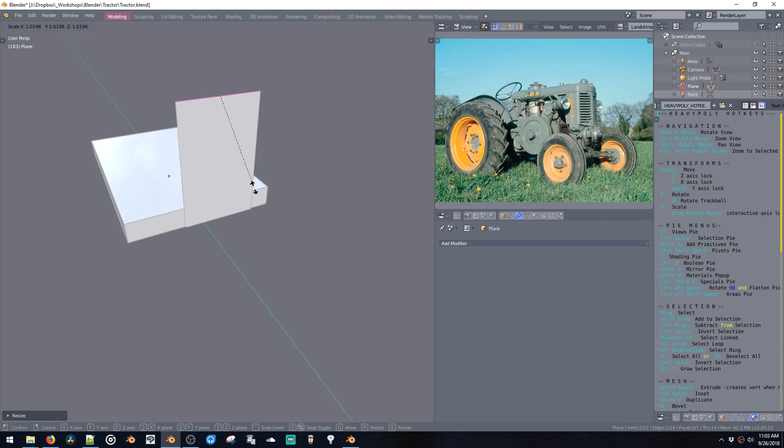Yeah, this is 2.8, so I spent all yesterday just messing around with 2.8 and trying to get these scripts up and running for my class tomorrow. So there's been a lot of Python lately, a little bit of scripting, trying to get 2.8 to be ready for prime time. So yeah, I'm pretty excited with what I did yesterday. It was a lot of frustration. I spent like 5 hours working on this stupid script that does a stupid thing, and now it's finally working, so I wanted to play with it.

Hi CNET, welcome. So today we are modeling a tractor instead of drawing it, and I hope that this video will be sort of a little something, for you guys who have never considered 3D, interesting to you as like a little demo of the kind of stuff that you can do with it.

And it's a lot like drawing actually, so I feel like it's pretty cool, the stuff that we can do. I feel like 3D modeling is related to drawing in that the process is similar, where we're trying to start off with very simple shapes and try to build things as simply as possible. And then as we keep going, we can get more and more into detail.

But for example, here I'm just going to start to bring out a bunch of rings pretty much, or donuts for the wheels, just very primitive shapes. And by the way, this is an Italian, what is it, Landini tractor.

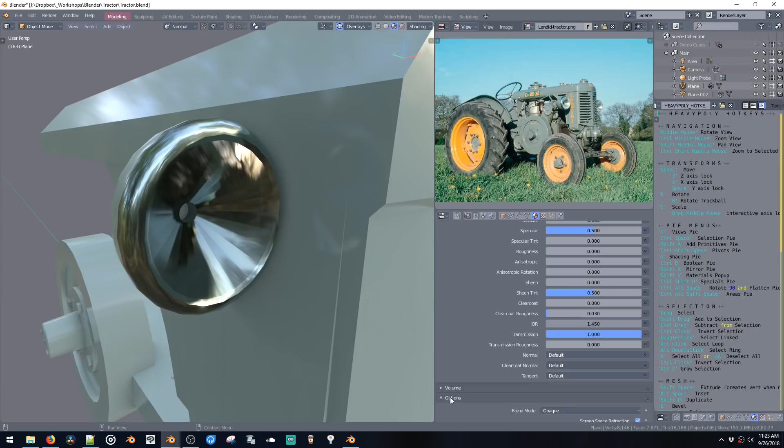And then Shift V, let's add a new material slot here and switch this to glass. And save this, I'm saving a lot because this is all new stuff and it may or may not crash. But yeah, we have glass in Eevee now, which is pretty sweet. You can adjust how thick it looks here, and give it some bubbles here. So yeah, that's pretty nice, decent.

I'm subdividing this to make it a little bit smoother. I feel like I could do the same thing here. I should have made this a little bit different.

Another option, if we need to make stuff smoother, is we could just subdivide the entire thing. But if I'm going to subdivide the entire thing, then I want to reduce my poly count a little bit. I know this is the heavy poly stream, but we still have to be responsible here with our poly counts, you know.

Alright, so if I go here, oops, Shift Z, Shift Z will go around in a circle like that, and then Shift Alt double click. Oh shit, what did I do? No, here, Shift Z, Shift Alt double click, Control X. Okay, so now I'm going to separate these two off with P, so these are on a separate mesh, and then I can subdivide these. So when you look at them in object mode, they get really, really smooth.

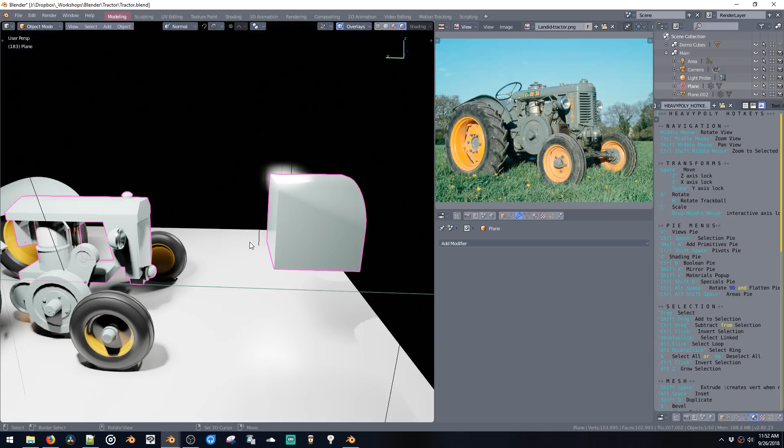MG says, I'm a 3D animator, just started my 3rd year, model a lot. Nice, that's a tough job. The animations, like, that would drive me crazy. I feel like that's the next level past of modeling. Never used 3D, I think I subscribed because I like your bug sketches. Cool, yeah, well, I hope this stuff is interesting and at least gets you thinking about 3D.

Spencer says, that's what got me back from Modo, the development is so transparent. Yep, I think that's my favorite part about it. Feels like you're part of the team, even though you're not, because you get to see what they're doing, and yeah, it feels like a little family type of thing.

Alex says, have you played with Quixel? No, not yet, I haven't really. I mean, usually I'm doing things that are just like studio renders and very clean materials, so I don't really do anything that needs grunge or scratches and stuff. I'm usually keeping it clean.

RJ says, I learned Modo from your tutorials and finished my thesis thanks to it. I used to tinker with it for 2D illustrations. That's awesome, cool, I'm glad to hear that. What kind of, was it a thesis of, were you doing video game stuff or some sort of a modeling program at school?

Okay. Okay, so let's try... cultural heritage, nice. That's cool, so I guess for your work, you'll be doing reconstructions and visualizations of historic restorations.

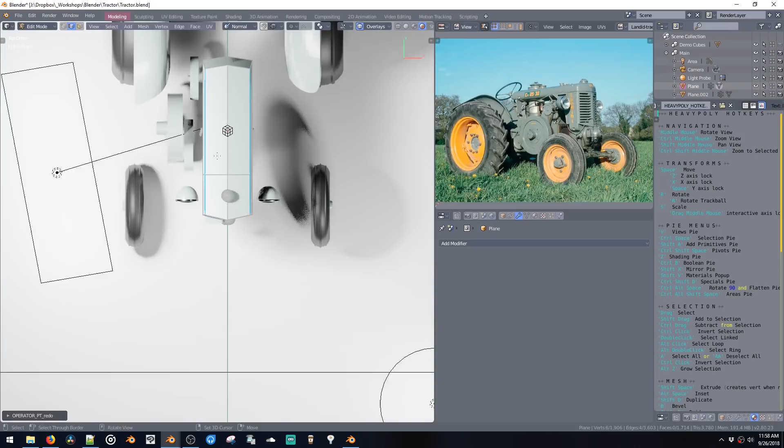Actually, I think I need to put a knife cut through all of this. There. Maybe here. And the reason I'm doing this knife cut is to make the front a little bit rounder, like that. So just these little subtle curves here will help a lot to make this feel more friendly and round.

And then we can mirror it over. Okay, and then, all right, I'm going to save this before I do the cut, just in case. There's the cut.

And ideally this would be a shell thickness, but it's okay. I'm just gonna roll with it like this for now.

And they look a little bit thick, like they should be more narrow. So I'm gonna undo this. And so these guys, to make them more narrow, I'm just going to stretch them out a little bit.

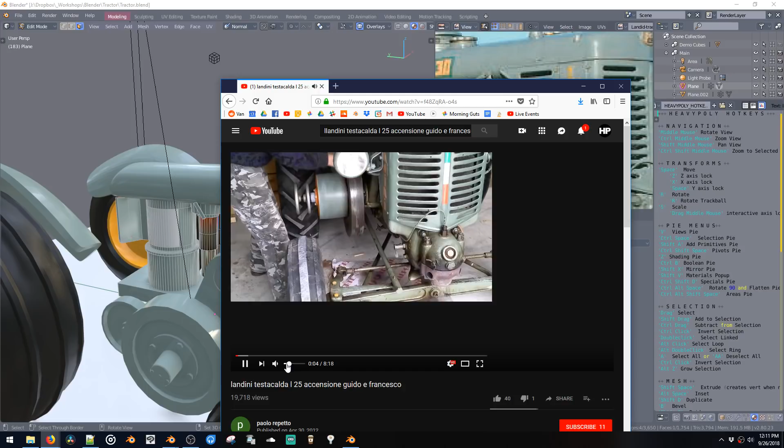So there's a giant flywheel. Here we go. Damn, look at that detail up here. It's beautiful.

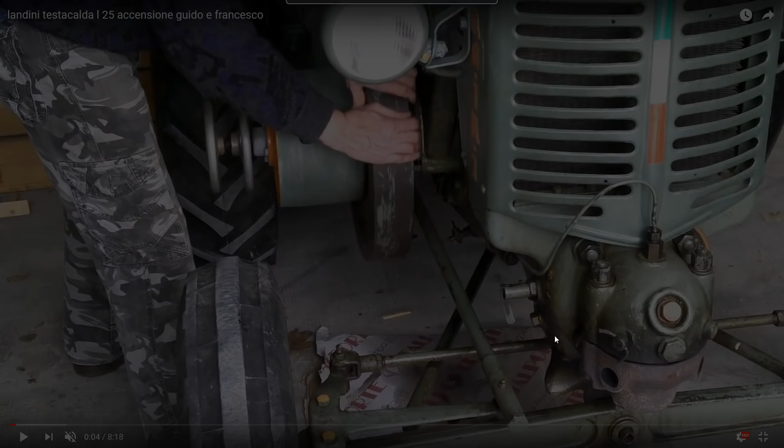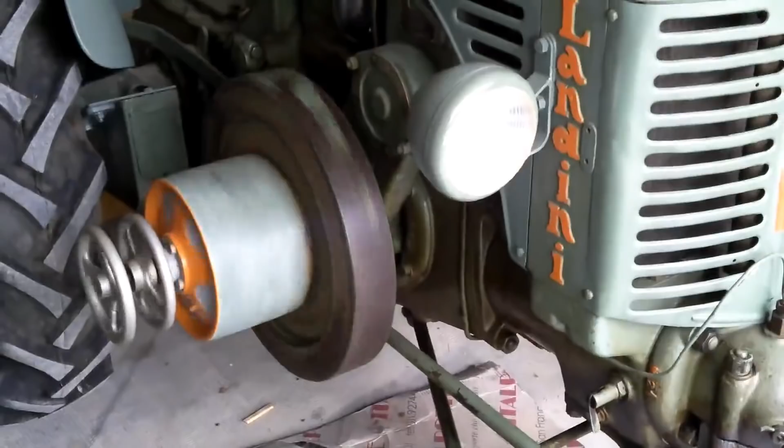And the giant flywheel. I guess they just need the power to be stored up in there so it has a lot of momentum and a lot of torque. I don't know, that's what I'm guessing. This thing is really beautiful. It's really funky.

Is there any function to make some slightly curved surfaces, like when you move CVs and alias? Yes, you can do that. Let me put this over to the side for a bit.

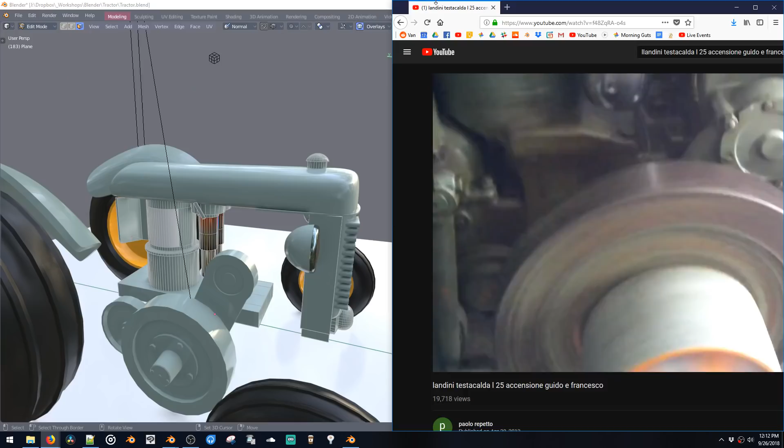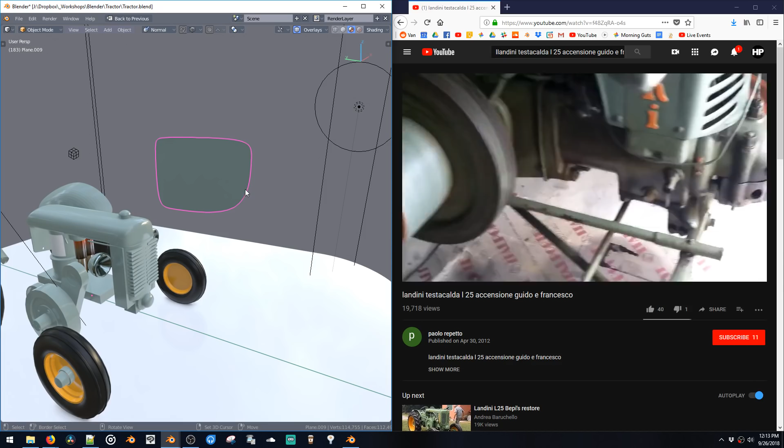So in Blender, those kind of CV surfaces, basically any vert here is a CV. You can think of it like that. And every edge is like a span. And if we were to subdivide it, that just means that when we curve it, it creates the curved surface.

And that's why polygon modeling is so powerful, because I feel like this stuff was a lot more annoying to do in Alias. You can make little bevels to make it sharper. And you can get really interesting shapes just by changing your topology a little bit. But yeah, it's extremely powerful. You can do really great organic stuff very, very quickly.

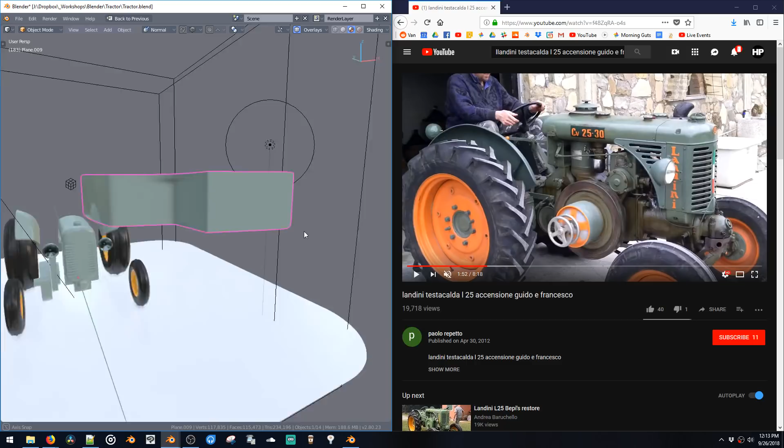Using this subdivision modifier here. Like that.

Smart boy, Isaac Newton. Well, you should check out Blender because it's also free. Or actually, SketchUp isn't even free anymore. But this is cool. Holy crap.

Alright, so there is two flywheels. Sorry.

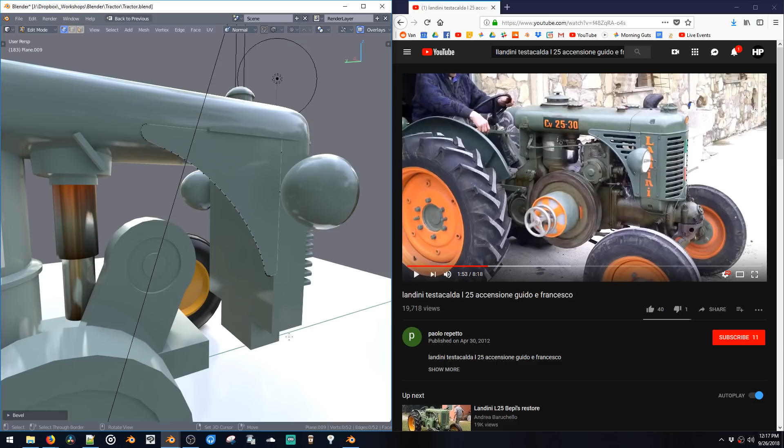So let's see if we can do this more efficiently. Maybe we could bevel these two. And then there's a little bevel down here. And there's also like a lip that goes around the whole thing. Maybe, how would I do that? Get rid of these ones.

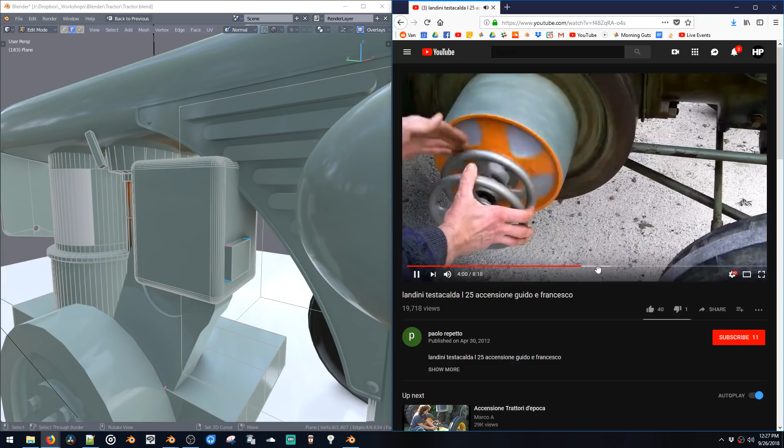Will it break if I just install some parts of it? Yeah, a lot of the hotkeys will break because for some reason you're not able to just set a key map using a script. You have to actually set the key map in the startup file if you want to disable certain keys. So it requires the startup file so that the correct keys can be disabled, so that the proper key map can work. It needs the whole thing for it to work, otherwise you're going to run into problems.

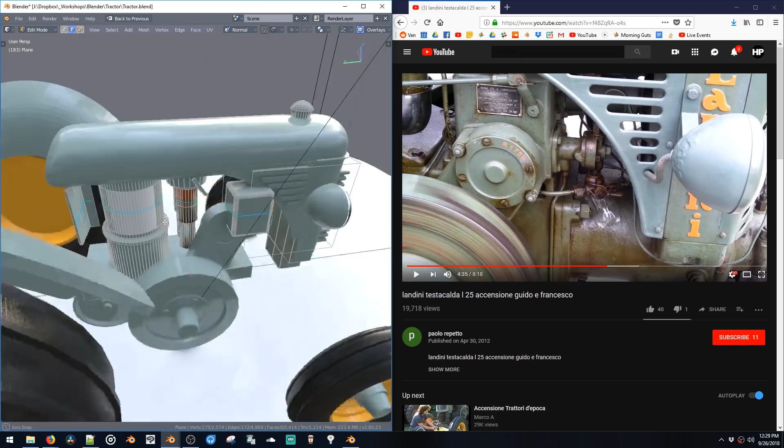Is it possible to insert a parallel loop of edges on several surfaces? I'm not sure if I understand parallel loop ones. You can make a cut through the whole thing, if that's what you're saying, like knife tool, K - that puts a cut through all surfaces. Is that it?

Eric, I teach at Brainstorm School here in Pasadena. Oh, not Pasadena, Glendale, that's where I am. Sorry, I moved recently, in the Los Angeles area.

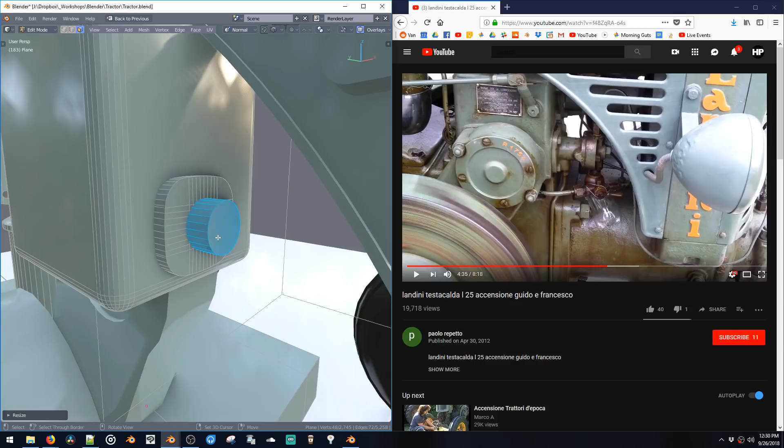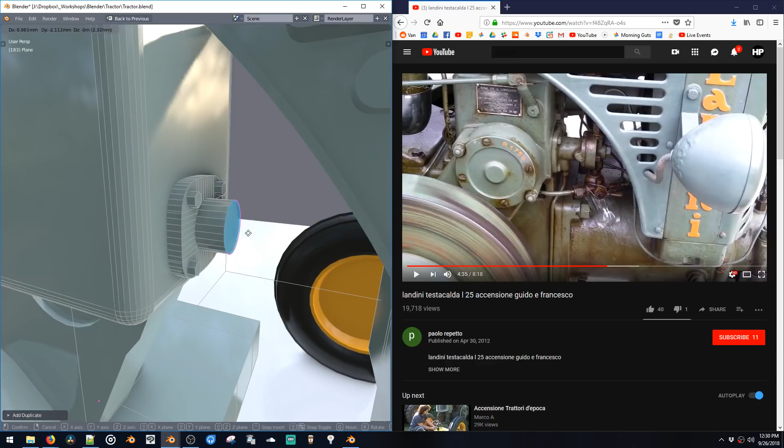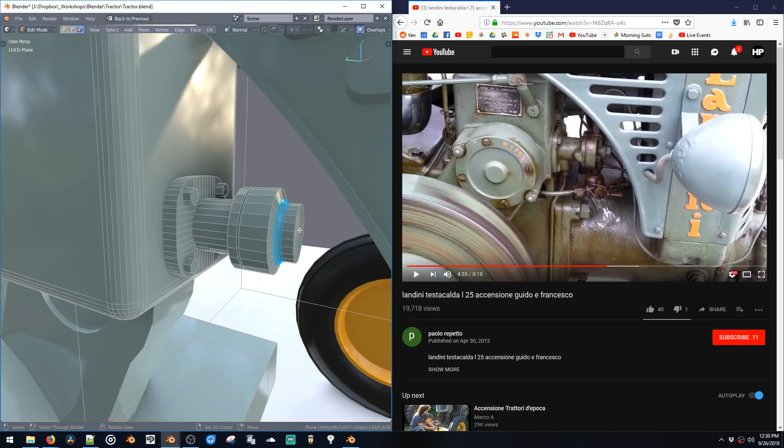So here I'm making it a little bit round first, and then we can bevel these, and then bevel these. So now it's kind of like a rounded square instead of just a square. And then here we can add like a 24 side, and maybe we can add a 6 side here. Then on this top side here, maybe we could add 12 side.

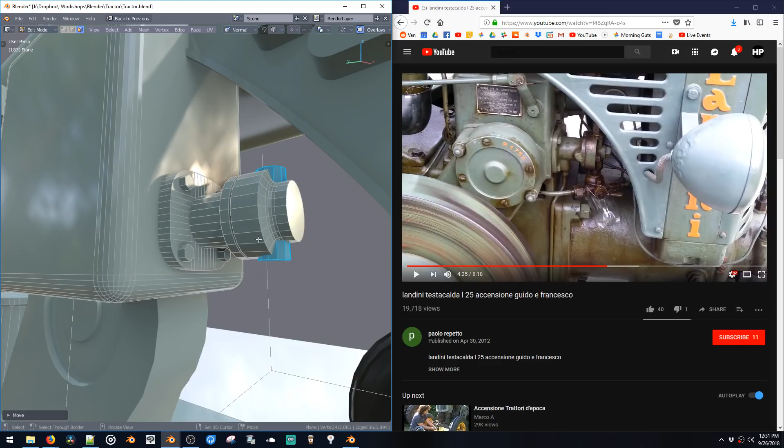One of our neighbors still maintains and actively uses an old tractor similar to this one. That's pretty awesome. I wonder what kind of gas mileage these get.

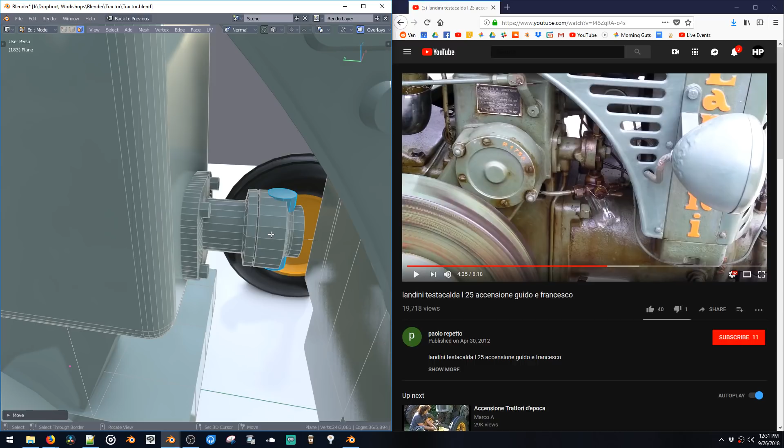Do you do one-day lessons, or is it a school thing where you need to sign up for a semester? It's a school with a semester and everything - it's a 10-week semester, and we just started the term this last week.

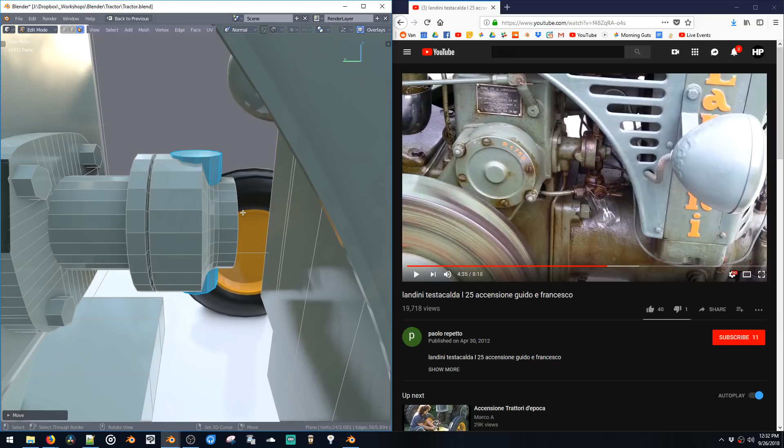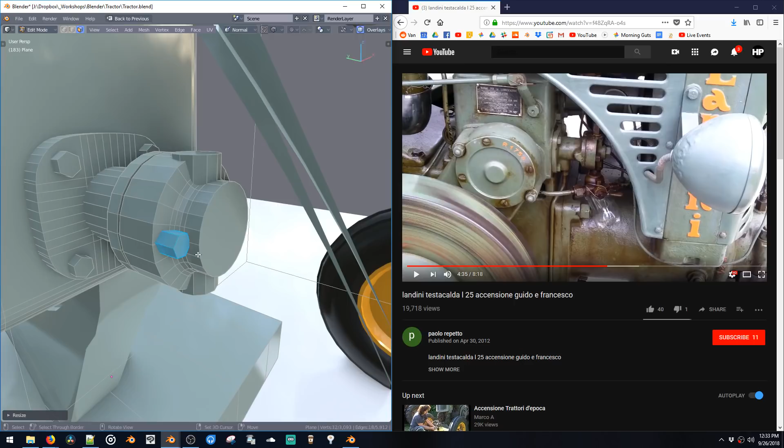Did you ever try CAD for hard surface and retopo output mesh? Do you think it's worth it, or the Booleans bevel combo in Blender is clean enough? Yeah, I've tried Moment of Inspiration, I've tried Alias, Fusion 360, SolidWorks, that one on the iPad. I've tried a lot of different CADs, and honestly I haven't put enough time into them to really understand it fully or get comfortable with it. But for now, I think polygons is good enough for the stuff I'm doing, and it's really fast also, which is nice. I think the other cool thing about Blender is it's not just for modeling - you can do a lot of other stuff too, like video editing, rendering, animation. So I think it's worth it for me, worth the disadvantages, I guess.

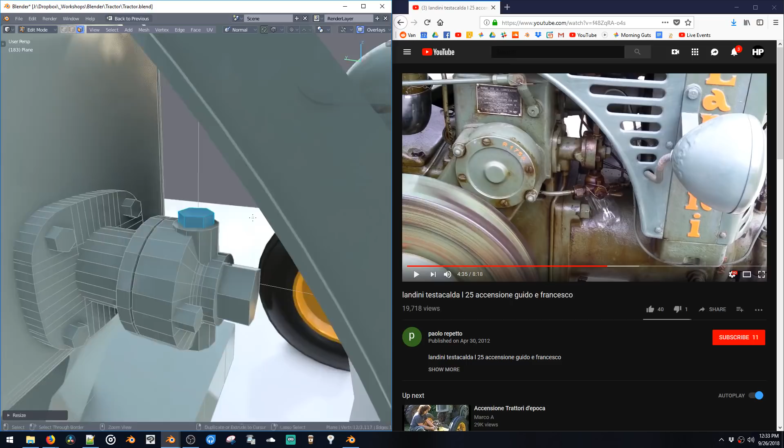Alright, I'm getting kind of caught up in details here, but I would like to maybe get more of the block-in done, like this giant transmission tunnel, and let me see. Probably this other pipe on the other side is, yeah. So here, let me get this one.

So this thing is not the same design, I think. It's similar, but somehow it's a little different from this side. Maybe this side - it's similar, it just has this extra like metal pulley.

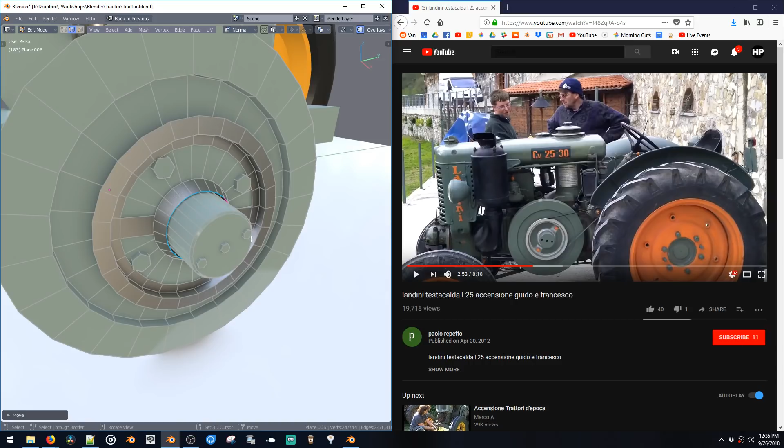Man, I'm getting hungry. Jeez, we've been going for a long time, guys. But I feel pretty excited about this whole Blender thing, and you guys have been asking some really good questions, and hopefully this has been helpful in getting you a little bit familiar with what you can do in terms of modeling in Blender.

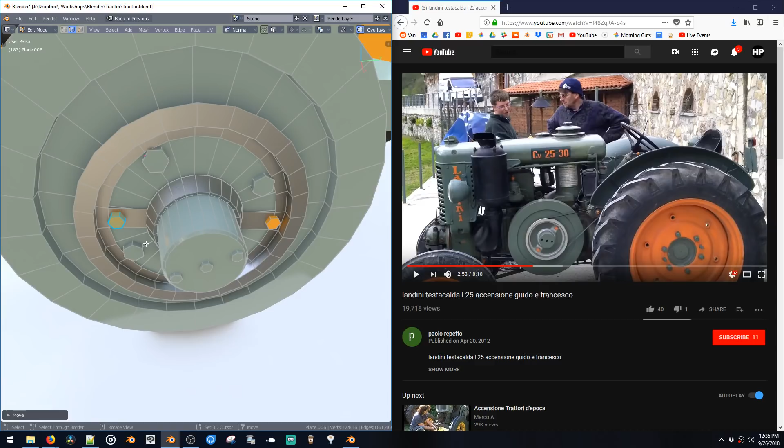Y90. It's got some orange here. This is a little bit wider. We can scale things by individuals, which means it's kind of like scale in place, if that makes sense. And then these seem to be just holes, because the other side was bolts. So maybe I need to switch this to a round piece here, a little bit smaller.

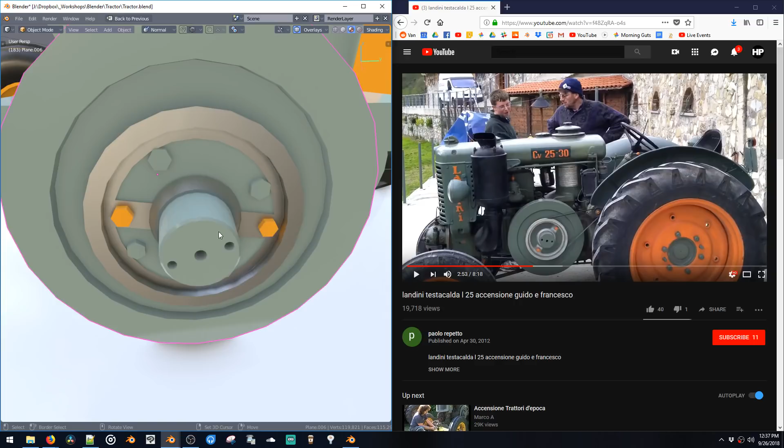Save. Still no crashes. We're doing pretty good today. I'm very excited there's no crashes on the stream. And here we are. Actually, I think this whole thing here should be higher resolution.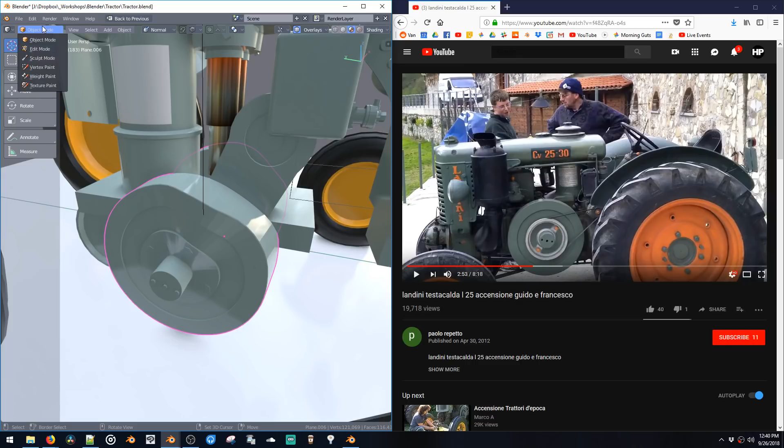Where's my... oops, can I undo that, please? Thank you. Okay, let's bring out the monkey. Sculpt mode. It seems like it's not updating right away, unless I'm crazy. Am I crazy? Yeah, I don't know what's going on, but it is there and it works pretty good.

There's also dynamic topology stuff and all this crazy stuff in the sculpting, but they're working on it.

I saw your Gundam model this morning, really neat. Would you consider designing a humanoid? Yeah, I do some humanoid stuff sometimes. It takes a while to do, so I usually don't, but yeah.

Better to turn on Dyntopo. Yep, yeah Dyntopo. I don't know what's wrong with the sculpt mode right now, and I don't see Dyntopo. Where'd it go? We need our dinosaur topo. Sculpt, enable mode. Where is it? Well, I don't know, they're probably gonna add it back in somewhere. I have no idea where it went. Oh, maybe you have to be in the sculpting.